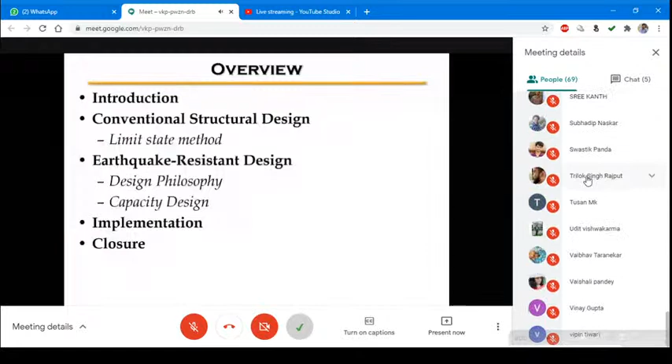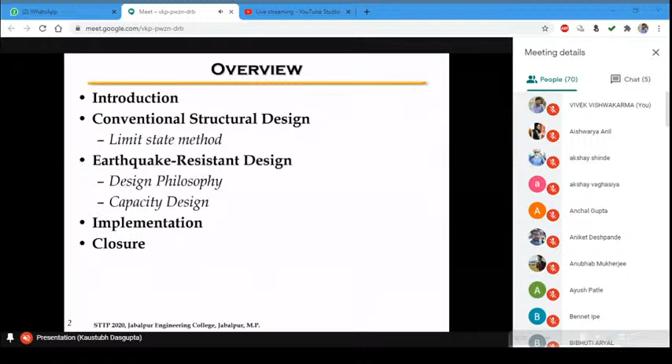So this is the overview of the topics which I'm going to deal with. First, we'll introduce what exactly an earthquake is and what its effects are. Then we will recapitulate some of the basic principles of conventional structural design, and see how we move into the earthquake resistant design philosophy, and finally culminate in the capacity design procedure. And then how do we implement this capacity design procedure in realistic design of buildings? I'll particularly focus on buildings, but in general it is applicable for any structure for which earthquake resistant design needs to be done. And then we will finally close with one or two of the major salient points.

As part of the introduction, let us recall what exactly happens during an earthquake. As you can see, there is the rupture of a fault at some deep location in the Earth's crust, which gives rise to release of seismic energy. That seismic energy was originally stored in the form of strains and deformations in the rocky mass. Once the energy gets released, waves start propagating in different directions, as shown along the two paths, the red and the green curved arrows. Along different directions the seismic waves propagate, and finally they reach the ground surface.

Initially they pass through the rocky mass. This is the rocky mass, and then they enter the ground layers, the soil layers. As you move towards the ground surface, they undergo all the mechanisms described in the physics of waves, giving rise to different wave fronts. Finally, when they reach the ground surface, they propagate primarily as surface waves, as you can see here, the wavy arrows. These surface waves are the most damaging ones from the structural engineering point of view.

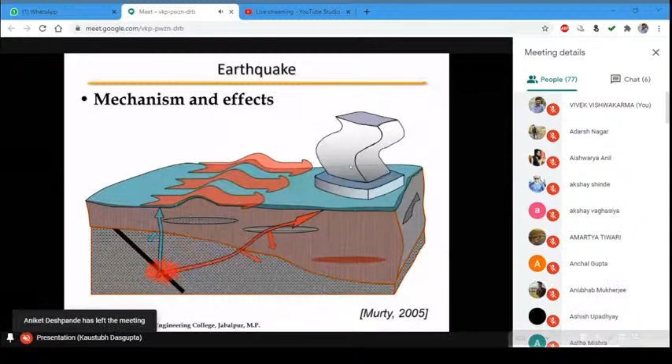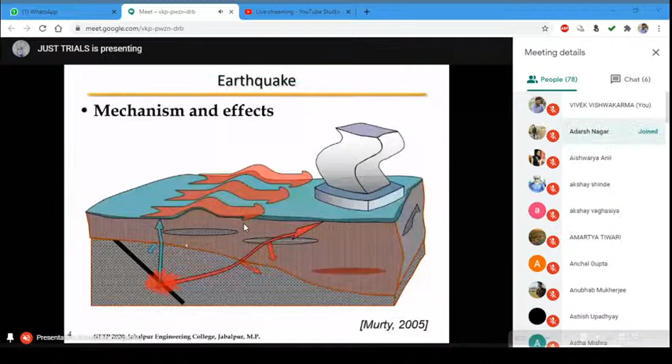As you can see, the foundation of the building first interacts with the waves along with the underlying soil. That vibration gets propagated into the superstructure, that is, the part of the building we see around. Once this entire system undergoes vibration, we get soil-structure-foundation interaction and all those effects. Surface waves are the damaging ones, and our earthquake resistant design primarily deals with the effects of the surface waves. We also have the body waves, which started propagating after the rupture of the fault and the release of the energy. However, those body waves are not so damaging from the structural point of view. Fine. So this is how the earthquake happens, and the waves come and shake up the entire structure.

So depending on the intensity of ground shaking under the surface waves, we can have different levels of damage, from minor damage to severe damage, and the well-known implications. Having gone through these effects of earthquake, let us see some of the visual effects we generally look around. Most of you are familiar with these, but let us recall what the different effects are. From a structural engineering point of view, the collapse of buildings under severe shaking is the primary concern. How do we prevent the entire collapse of the building?

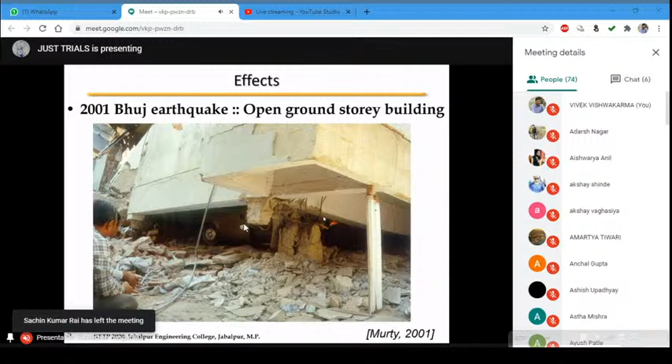As we will see in earthquake resistant design, sometimes we allow the building to undergo damage. It's not that your building will be entirely damage proof or distress proof during the earthquake shaking. It's not like that, otherwise it will not be an engineering structure. The economy will not be coming into the picture. Anyway, how to prevent such collapses is our primary concern.

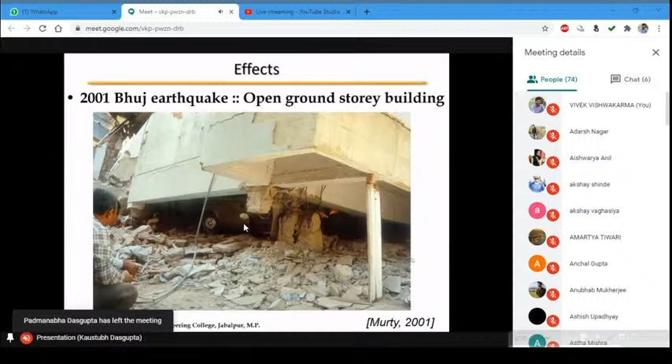This was taken from one of the building locations during the Bhuj earthquake. As you all know, the open ground story buildings were the most damaged ones during the Bhuj earthquake shaking, and this was one of the building collapses in Ahmedabad city. As you can see, a lot of infrastructure gets damaged. Next, we move on to bridge type structures, which are used in transportation engineering.

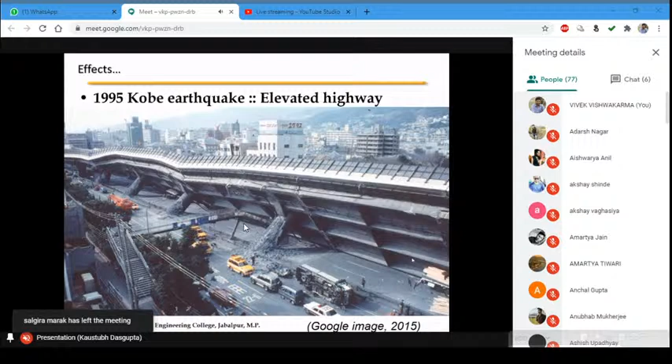So in no way, at any point of time, should they be allowed to collapse. They should always be in functional condition, whether there is an earthquake or no earthquake, whatever be the condition. Let us move to the next one.

This is a figure from Navlakhi port along the coastline of the Kutch region in Gujarat. That port area had a railway line running along the embankment along the coast. And then what happened? There was severe movement of the ground during the shaking. Those surface waves caused severe ground deformations, ground displacements. As we can see, the levels and the different reference points have all become topsy-turvy. The signal has undergone tilting, and the railway track has become undulated. So in no way are these in functional condition. Again, the same issue: if your railway track is damaged, your transportation of goods and wagons gets disrupted, and you cannot mobilize the relief and rescue missions.

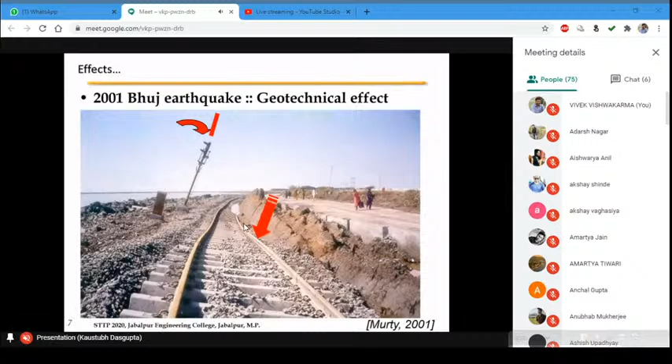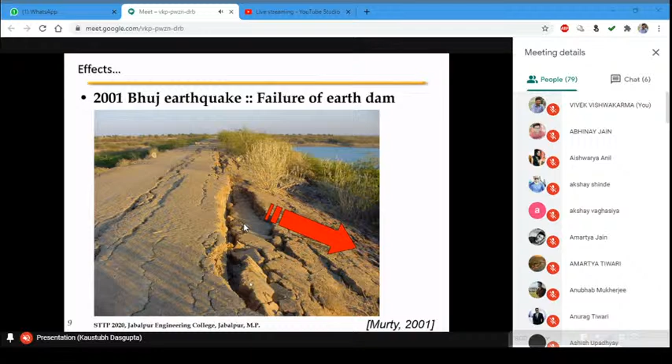As we have seen, different regimes of infrastructure undergo different types of damages, and the implications and consequences are manifold. Primarily, what we look at are the physical damages we see around visually, and the associated economic damages. Depending on the magnitude of the earthquake and the location of the site, we can have different degrees of damage.

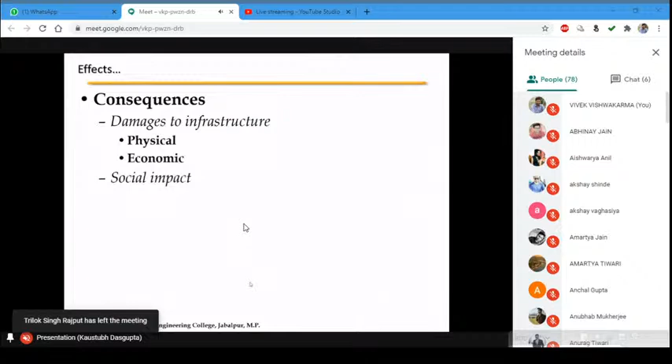Our society is not supposed to bear and see these damages. It is not a direct impact, but social impact is an indirect consequence, because many people have their livelihoods affected. That leaves a social impact on the future of daily wage earners and other people especially. It's not a direct consequence, but still it has a lasting effect. All this makes it imperative to focus on and carry out earthquake resistant design, so we never forget to highlight the importance of this issue.

Moving on, let us relook at what exactly conventional structural design says, and how we carry out the design of general buildings. Before we embark on design, we have to first analyze the structure, and nowadays most analysis is carried out with computer programs having different graphic user interfaces or background programs. First, we have to idealize the realistic building and model it in a way that captures the real behavior.

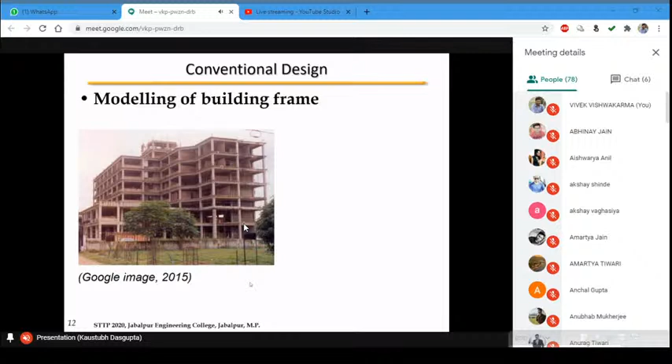So how do we model the building? That is the conventional way. All your beams and columns, as we see in this typical reinforced concrete frame building found in urban areas, are modeled. We may or may not model the floor slabs and the roof slab, but we never model the underlying soil over which the building stands. What is the reason?

Because the behavior of soil is more uncertain than the behavior of concrete and steel in the building. Unless you are certain to a particular degree how your material will behave, you never incorporate it in your design. That's why if you look at the design guidelines or codes of all countries throughout the world, nowhere does it talk about taking the soil model into consideration while analyzing the building for its design. That is the main reason.

And if you map this same philosophy into the dynamic behavior regime of the structure, the dynamics of this system will involve soil structure interaction, as I mentioned. So in soil structure interaction also, you will never find any provision or clause in any of those design guidelines. That is the main reason.

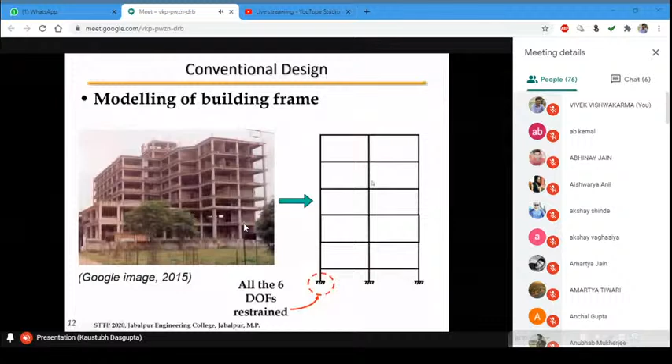So to analyze linear elastic behavior, we assign the design loads: the self weight of the building, your live load at different floors, that is the weight of the movement of the people or of goods. And then you have additional loads coming from wind, earthquake. If it is in a cold region, you may have snowfall and so on. So all those possible loads are considered. And when we are considering earthquake loads in analysis, we have to refer to the design load combination mentioned in the Indian standard IS 1893 2016. I forgot to mention the part.

This is part 1 for buildings, but there are other parts of IS 1893 also. So part 1 is for the building, and as you can see here, this is a frame building with reinforced concrete wall. So what you do, you isolate each member, and from the computer program itself, you get the design forces and moments. Basically, it solves the entire structure using finite element method, and then gives you the internal forces or internal moments at the different sections. If you draw the free body diagrams, you should also arrive at the equilibrium condition.

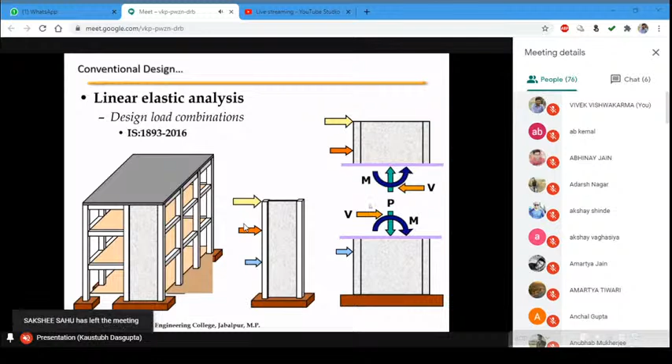So based on these design forces and moments, then you do the design as per the limit state method. As we know, the limit state method has two parts. One is the limit state of collapse, which deals with the strength of your member, how much bending moment the beam can take, how much shear force the beam or the column can take before it collapses. That is also the limiting strength or the ultimate strength, and we talk about the design capacity. Primarily your members in the building are designed against flexure and shear, that is the bending and the shear behavior. Depending on the geometry, whether the members are slender or short, squat members, you'll have dominating effect of either bending or shear.

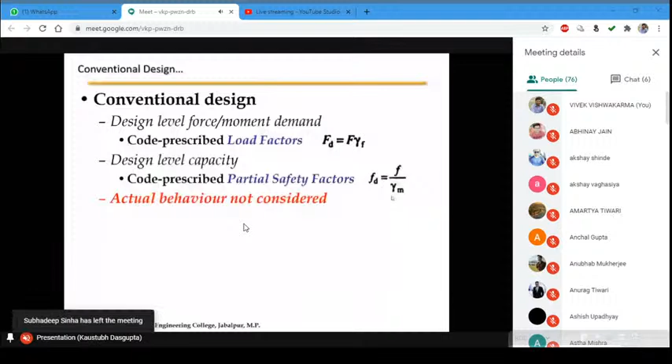So we never try to do the design calculation based on the exact actual material strength, because we never know what exactly is going to be the value. So we keep a sufficient safety margin so that we are on the conservative side. Since actual behavior is not considered, at some point of time we will see that we are not doing justice, especially when we are trying to do the design for resisting the earthquake effect.

So earthquake resistant design has two levels. One is the conventional design as per the limit state method, for strength and serviceability, collapse and serviceability. And the second stage is given by the capacity design. So in earthquake resistant design, capacity design is one part. When we talk about earthquake resistant design, it's not only capacity design. You have the conventional structural design in place. In the first place, you have to do it, no other way. And then you have to do the capacity design in order to ensure your safety against earthquake shaking, right? So this is how capacity design becomes mandatory in the entire earthquake resistant design procedure.

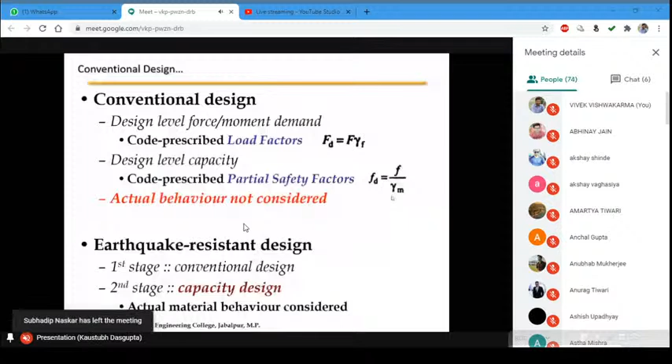So in capacity design, as we will see, the actual material behavior is considered. Okay. So let us briefly dwell upon the basic philosophy of earthquake resistant design. Before we go to earthquake resistant design, there is another term which many of you may be hearing or may be confused about: what exactly is the difference from earthquake resistant design. That term is earthquake proof design, right?

So it basically talks about an undamaged structure. Whatever be the level of shaking, the structure will not be damaged at any point. Now, what is damage? Under normal circumstances, we see that your beam or column or any concrete member has small cracks, micro cracks, which may be observable to the naked eye or may not be. And you also have many cracks in the interior mass of the concrete, which we can't observe from the outside.

So these cracks make the concrete weak, right? Any type of crack makes the section or the object weak. So is this damage? Structurally, the micro cracks are not part of the damage. Only under the application of load, when your cracks start propagating and new cracks are formed, and they have a detrimental effect on the behavior of your member, do we term them damaging cracks, part of the structural damage.

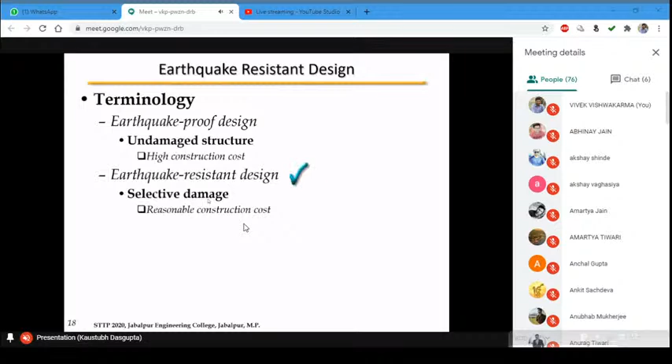So for ordinary structures, we always carry out earthquake resistant design, where we are going to have selective damage at certain locations. That brings down the construction cost, brings down the sizes, and makes it affordable for ordinary people. For earthquake resistant design to be carried out, we need to know the level of shaking. You have a building located at some site, and then you have different faults or geological features around the site. Some of them may be within 10 to 15 kilometers, some 50 kilometers, some may be 700 kilometers.

Now the question is, which are the faults going to give you the maximum possible shaking for the building at that site? That is the primary concern. And till now, it has not been possible to very accurately and deterministically state that yes, this is the maximum possible ground motion which is going to be experienced at this site. Till now, people have not been able to find that out.

So we generally talk about different levels of shaking, and most of the design philosophies are based on 3 levels of shaking. As you can see here, one is the minor shaking, one is the moderate shaking, and the third one is the strong shaking. Now, it's very obvious that if the shaking is minor, with very little vibration, your damages are minimal.

And if you have very strong shaking, you have the possibility of collapse. But then we also look at how frequent such earthquakes, which give minor shaking, are at that site. How frequent are earthquakes which give rise to this strong, very damaging shaking at that site? So there are 2 levels.

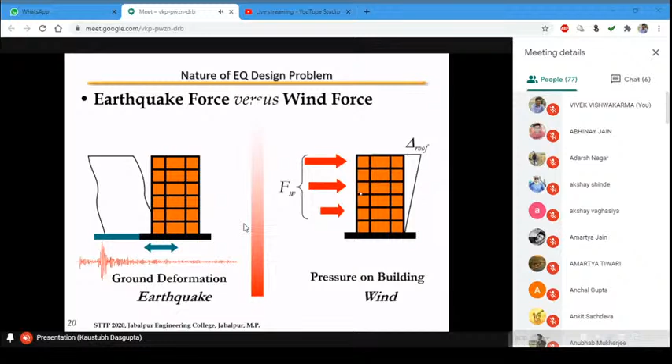Whereas in case of wind, we have the wind speed in different directions at different points of time, making it a dynamic pressure from different directions. So there is no deformation or movement of the ground involved, it is only application of lateral forces. So the deformation or the behavior of the building is completely different, because in an earthquake the deforming foundation shakes up the building, whereas in case of wind, the deformations come directly from the force or pressure application, right? Due to this difference in the application of force on the building, the two behaviors require two different characteristics.

If you take a very small idealized frame consisting of two columns and two levels, so two beams or two slabs, and you apply the force, it tries to sway, and that involves a top level displacement of delta at the top. So in this variation of H with delta, if you look at the curve, you get a generic curve like this. And in case of wind, when you are applying the pressure directly, the wind behavior is mostly in the linear elastic range, right? Unless you are looking at a very high intensity gust during cyclonic or tornado conditions, then you can have severe damage. Otherwise, it is linear elastic behavior, no damage is involved. So this wind behavior is mostly elastic.

However, during the ground deformation, the shaking of the bottom, when your frame is expected to deform, your lateral load behavior is going to involve a large range of deformation.

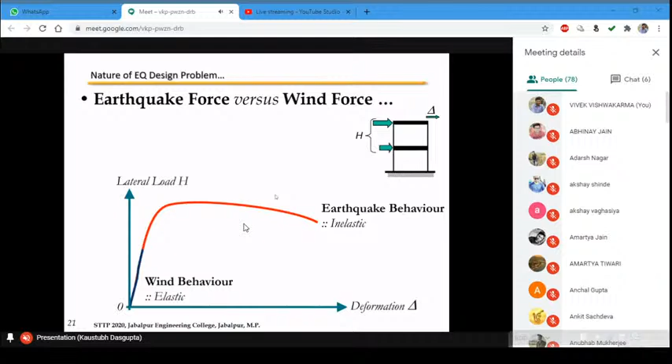Okay, so behavior wise also, the two applications of the ground deformations in earthquake and the dynamic pressures in the wind, okay, they bring different effects. So in order to understand in a slightly different aspect, the loading in case of earthquake is from ground deformation. As you can see, this is the general signature of the variation of displacement or velocity or acceleration of the ground shaking with time. So this involves the displacement loading on the foundation. So basically, we are applying displacement on the piles, displacement on the footing. We are not applying pressure on the beams and all. Whereas here, as you have mentioned, is direct application of the pressure on the building.

Okay. Now, some of you may be asking that we also look at a similar distribution of lateral forces in case of earthquake analysis. When you do the equivalent static method of analysis as per IS 1893 part 1, we also look at a diagram in somewhat similar way in case of earthquake also. So how does it arise? When we are saying that it is primarily due to ground deformation, but then when we really apply the seismic load, we have the different loads at the different floor levels. So how do we really reconcile these two?

So what happens is this dynamic shaking of the ground, this deformation time history or the deformation signature of the ground, is imposed on the foundation. It gets propagated to the top, the superstructure, the building. And then at different levels where masses are lumped in case of a multi-story building, we have the inertia forces coming into action. So the different levels of the lateral force application, what you have seen in these types of figures in case of earthquake loading, are nothing but the inertia forces which are generated at the different levels of lumped masses. At the floor levels where we have the slabs, we have the different masses lumped. So they are going to give rise to those inertia forces. Okay, so those forces are applied on the building, right?

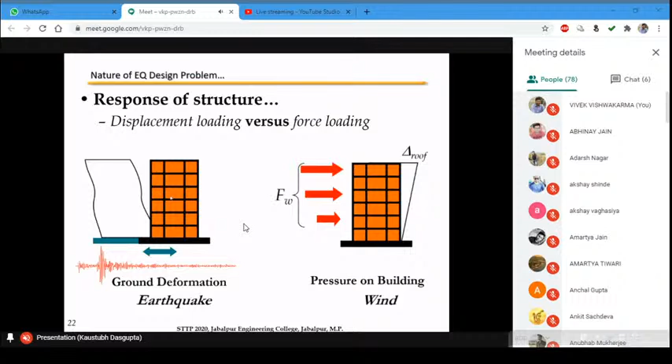So we have the force control system where you have the gravity loads under the self weight or under the wind, where failure occurs if the imposed load is more than the yield force. Why is it so? Because under gravity load, that is self weight, under live load, under wind, we do not expect any damage to occur. Linear elastic behavior. So we have the yield point, yield level in your entire nonlinear curve. Okay, so beyond this yield point, you never expect the structure to cross. Okay, so that's why your system is a force controlled system under self weight or live load like that.

Whereas in case of earthquake loads, it is a displacement controlled system, because as we have mentioned, we need large deformability. If you look at the figure, you have the large deformability or the displacement. So imposed displacement, if it is more than the yield displacement, still we do not call it a failure. Okay. So that is the fundamental difference between your force control system and displacement control system. So the main characteristic which we require for such a displacement control system is your ductility. Okay. The system should be ductile. So in earthquake resistant design, time and again we are also going to emphasize in the next slides that ductility is the key for a desirable behavior.

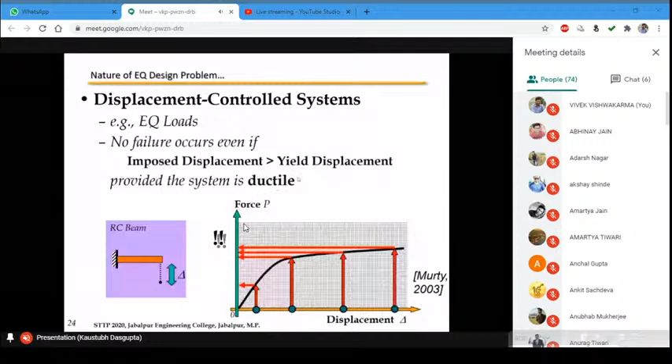So what exactly is ductility? Whenever we ask anybody what is ductility, we get different types of answers. Primarily in case of seismic behavior, earthquake resistant design, what we look at is a large extent of inelastic deformability, right? The inelastic deformation capacity will be large, with a certain condition. What is the condition? Your strength should not reduce.

A system cannot be a ductile system if that degradation of strength is observed. It has to maintain the level of strength, even at a large extent of inelastic deformation. There are different exact definitions of how much strength degradation is allowed when you call a system ductile, but primarily the strength degradation should be minimal. Then only we call the system ductile. It should not be like it picks up the strength and drops off and then you call it a ductile system.

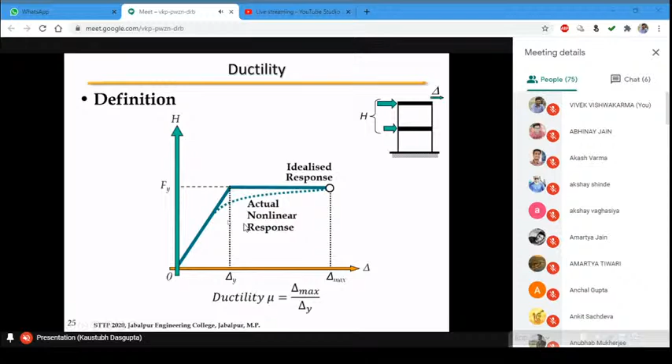And then when we try to mobilize ductility through the design procedure, we have a building with so many components and so many sections that the ductility also needs to be sufficient at different levels. So basically different measures of ductility are there depending on the location. One is the overall structural ductility. If you go back to the previous figure, here we were looking at this idealized small frame where we had the total lateral force H and the lateral deformation delta. So we were looking at the overall behavior. This graph shows the overall behavior of the frame. So the overall structural ductility should be sufficient.

Story ductility. What is story ductility? You take any story and you know the shear force at the bottom section of each column. You add them up, all the bottom sections of the columns. So at the bottom of this story, what is the total shear force? So total story shear versus the displacement of that story will give you the story ductility. Similarly, we get member ductility. For each of these columns, each of these beams, you get the member ductility. Of course, you get the section ductility. So there are different measures of ductility. I'm not going into the detail, but when you are doing the earthquake resistant design, all these you need to keep in mind. So that's what we desire.

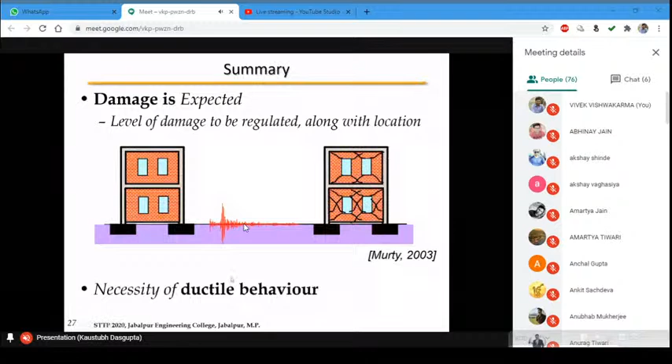So the question is whether we will allow it, or whether we will call this behavior the desired behavior or not. Your main structure is undamaged, but damage or energy dissipation has occurred at certain locations in your infill walls. So for every structure, looking at the components, we have to select the location where we want the damage to occur. And then you have the necessity of ductile behavior. That is utmost necessary. When you look at the overall behavior, we want to re-emphasize that if you continue the linear elastic behavior, you get the maximum elastic force. No damage. This is the level of force you will get if you want earthquake proof design.

Linear elastic behavior: no damage, no reduction in the stiffness, no reduction in the slope. This linear elastic response will give you that earthquake proof behavior. But we are going to land up with large sizes of members because this F max is a large strength. All your columns and members are going to have the total strength like this, and that will involve large sizes. Instead of that, we allow damage and then your slope gets reduced, and at the same time we have to trade off with a large deformability. So we want ductile response, but we don't want brittle response. Brittle response means your strength degradation is very high, and at very early deformation the strength gets degraded. So brittle response is strictly no. We want the ductile response.

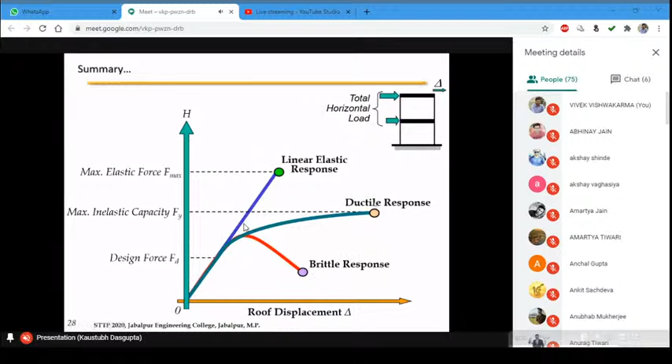In order to have good earthquake resistant behavior, we also need to avoid certain types of nonlinear behavior. Some of you may be familiar that whenever we talk about nonlinear behavior in structural engineering, we are primarily dealing with two types of nonlinearity. One is the material nonlinearity, which involves cracking of concrete, yielding of steel, crushing of mortar, crushing of concrete, like that. And there are other categories of nonlinearity, which is known as geometric nonlinearity, which deals with the deformed shape. One very common example of a detrimental geometric nonlinearity is buckling. The sudden lateral deformation under axial compression of any vertical member, that is called buckling.

Then you have the P delta effect, P capital delta, P small delta. All these are geometric nonlinearities. Now, if you look at the effect of geometric nonlinearity on the behavior, most of the time, if these geometric nonlinearities tend to dominate the behavior, you are going to land up with a brittle type of behavior. It will not be a ductile behavior. So we need to strictly impose the criteria to avoid geometric nonlinearity.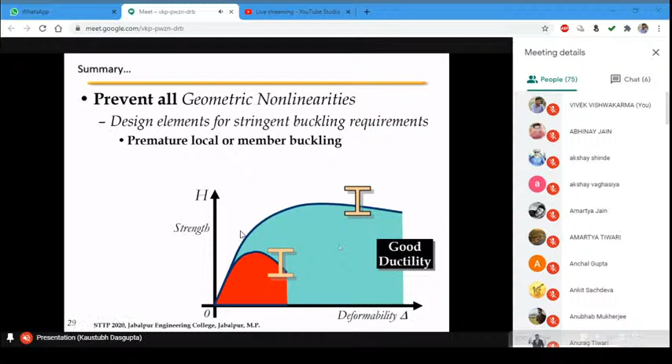Premature failure needs to be avoided. If premature failure occurs, very early failure occurs, your building will not be able to take that deformation, not be able to take that sway. Before that itself, it is going to go down. And we need to encourage different types of material nonlinearities. Why am I saying all material nonlinearities? Because in some way or the other, they help in the energy dissipation. Whatever seismic energy is coming as input to your building from the shaking of your foundation needs to get dissipated. Then only your proper behavior will be mobilized.

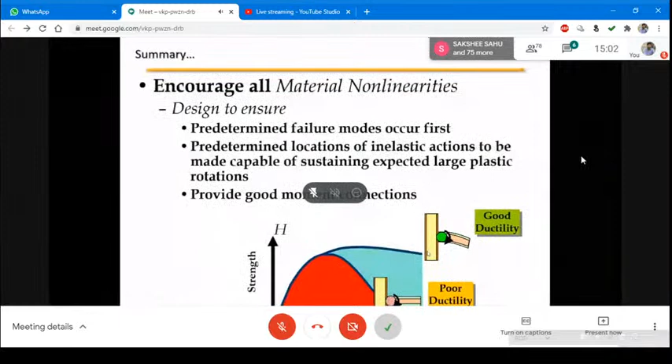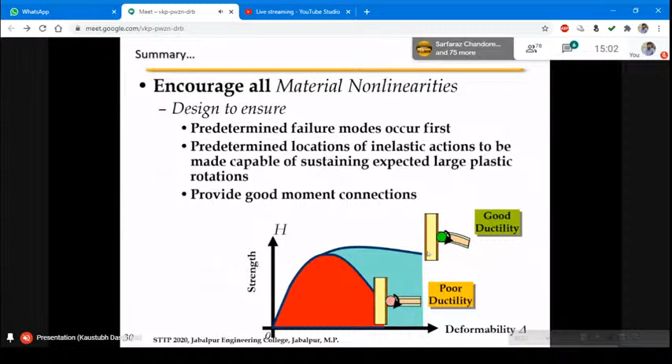So in that case, you need to determine which failure mode should occur first. Then your locations of inelastic action, then your moment resistant connections. All those come under the detailing. When you do the detailing, whether it's reinforced concrete, timber structure, masonry structure, steel structure, whatever you talk about, detailing is very, very important. So these are the summarizing points for an earthquake resistant design. As we had seen earlier, capacity design is one part of earthquake resistant design. So we will move to the capacity design.

Before that, let us take a break for a couple of minutes. If you have any questions till now, let us interact. Any question? Participants, if you have any question till now, you may ask.

When we teach in class, when we address our students, if we do not see any question, that means either the entire stuff has been very well understood, or it may not have been understood by anybody. Anyway, please feel free to ask any question. Others can also learn. Don't feel shy. I guess there are a number of students, right, Vipin? Yes, sir. Okay, so let's move on.

Having that background, since we have come across terms like requirement of ductility and selective damage at certain locations, these are all part of earthquake resistant design. How are these going to help in the capacity design? Because capacity design is the second stage and the most important stage for earthquake resistant design. So let us start with the failure sequence. When we start with the failure sequence, we look at the strength hierarchy. Which component is going to undergo failure first? Whether it's slab, beam, column, footing or the soil, whichever.

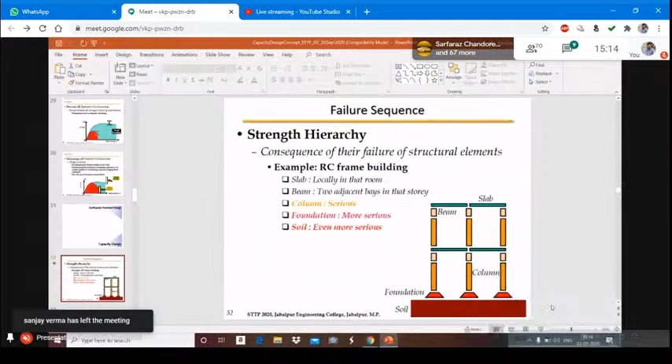Fine. So when we look at the different components, we have the columns failure giving serious consequences. We have the failure of foundation. It is more serious because most of the times it's very difficult to find out how the foundation failed, because you have the surrounding soil, and then how exactly it vibrated and behaved during the earthquake shaking is very, very difficult to ascertain. Okay, but still people put sensors and instrument the entire building, starting right from the foundation, soil, and every time. So but still they have serious consequences.

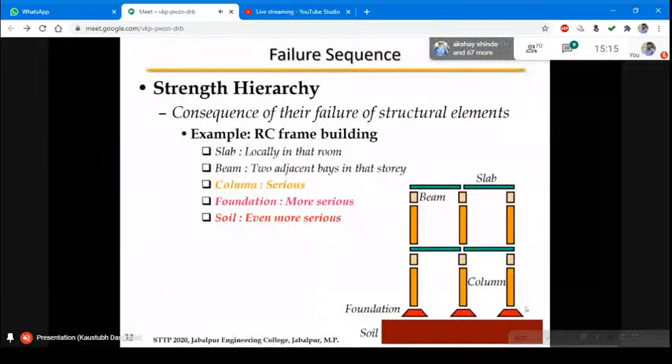And obviously, as I mentioned, the modeling of soil is very uncertain, and the failure of soil is also very, very detrimental. Okay, you never know which part of the building gets settled down, or some part of the soil may get liquefied. So there are various possible effects. So once we have the strength hierarchy, and then you have the type of damage. So some of the failures are brittle in nature, some of the failures are ductile in nature, right?

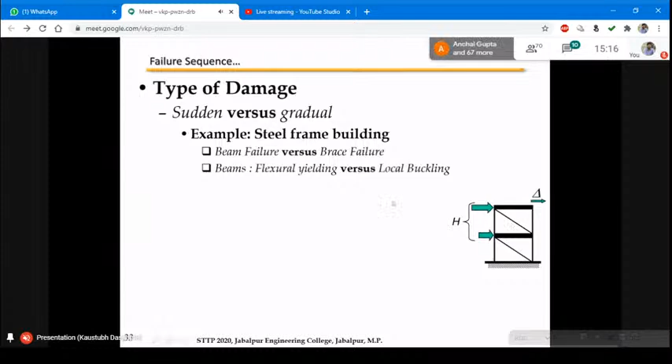So beams generally undergo flexural yielding. Okay, and then the beams can undergo local buckling also, like flange buckling, shear buckling, web buckling. There are different forms. So some of the brittle failure modes are possible, some of the ductile failure modes are possible. So again, if you plot the overall lateral force versus deformation profile, this curve, your desirable behavior is the ductile in nature with flexural yield response, and your geometric nonlinearity in some form of buckling, whether it's global buckling or local buckling, it's non-ductile. That's why we mentioned to avoid geometric nonlinearity in one of the earlier slides.

And brace failure, if it is in compression, okay, in the form of buckling, it should be avoided, because all these buckling failures, they are premature, they are not contributing to the required deformation capacity. Okay? So these should be avoided. So the type of damage becomes important. So in the earlier slide, we talked about the hierarchy, which component will fail first. Okay, and next comes the type of damage.

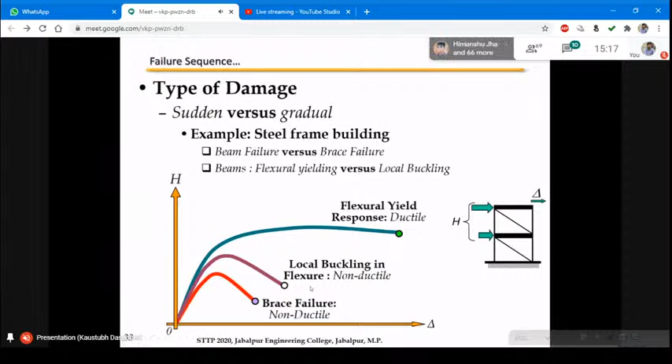Now, in your superstructure, if you leave apart the foundation and the soil part, in your superstructure, the slabs are least likely to fail. So most of the time, our capacity design for reinforced concrete frame building revolves around the failure of beam and column. Okay, so you can have two possible configurations of the building. Okay, under the same design load, you can have different configurations. So the sizes what you choose for the beams and the columns will give rise to one possibility where your column is comparatively weaker as compared to the beam, right? The second one has the beam comparatively weaker as compared to the column.

So one is called weak column, strong beam, because as you can see, the beams are having more depth as compared to the lateral dimensions of the column. And the other one has the weak beam, strong.

Now, as we mentioned in the strength hierarchy slide, the failure of columns is more detrimental as compared to the failure of beams, because they are the main supporting vertical members. So here, your beam is stronger as compared to the column. So the weak columns are most likely to fail earlier under the earthquake shaking. Okay. Do we want that? Strictly no, because we have the possibility of cascading collapse of the entire building.

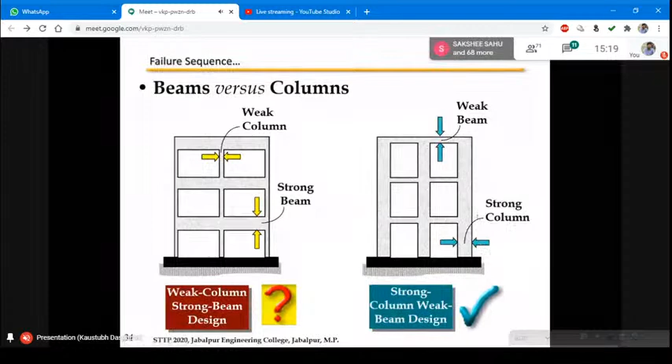Right. Then you have strong column, weak beam, the other one. What is the possibility here? Your column is not likely to fail before your beam. Okay, the beams will undergo failure first. So your overall frame, overall structure is not going to come down. You have low level beams getting distressed and damaged, but your overall structure will keep on standing. Okay, so this is desirable. So you should always go for the weak beam, strong column design.

Okay, so repeatedly, again and again, we all talk about this. So just to make you understand, for a frame type building, for each member or component, you decide which component you want to make weak and which component you want to make strong. Once you decide that, then everything falls in place. So that hierarchy is very, very important.

Then we come to the famous chain analogy. Okay, since we have two types of failure, one is the brittle failure, one is the ductile failure. As we have seen from the earlier slides, your ductile failure is desirable, brittle failure should be avoided. So now let us take a chain. Most of the links are brittle in nature, and an intermediate one is ductile. So this is the undeformed chain. So we have made the chain in such a way that the materials are brittle and ductile accordingly.

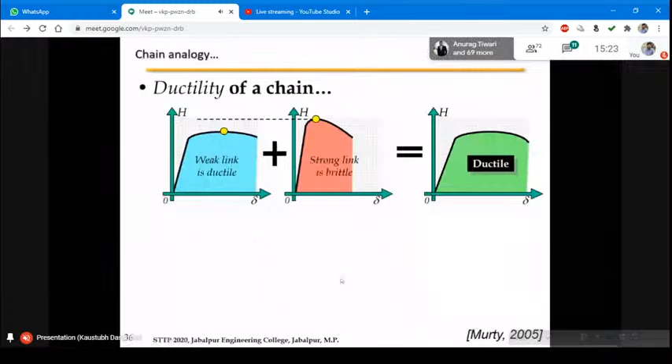So one point to be clarified: when we are talking about failure of a brittle link or brittle member, that means it reaches the peak strength and suddenly drops off. When we are talking of failure of a ductile link, we are not saying that it is going to drop off after that. So once it goes into the inelastic part, we are saying that the ductile link has undergone failure. So it's not that the ductile link is breaking off. No, it's not that.

If you try doing the same analogy, when the steel yields, we call that the failure point of the under reinforced section. So it is not that the steel reinforcement bar breaks off or ruptures. It gets yielded, so it gets stretched.

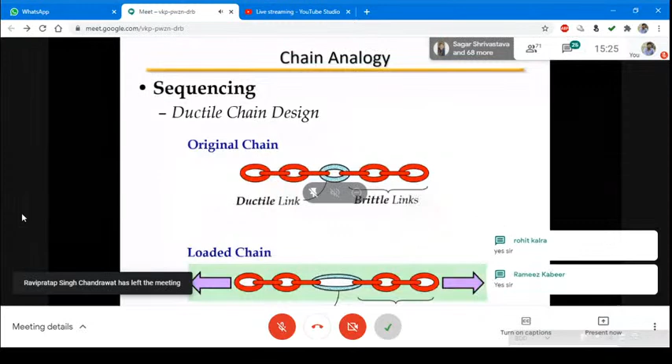Are you able to hear clearly? Hello. Is it audible Yes, sir. clearly? Yeah. Audible? Yes, sir. Audible. Okay, I'll continue. Okay, sir. Okay. Oh, again. it is breaking. The Hello, sir. is it breaking? Yeah, yes, sir. Okay, let me just Yeah. is it clear now? Hello. Yes, sir. It is clear.

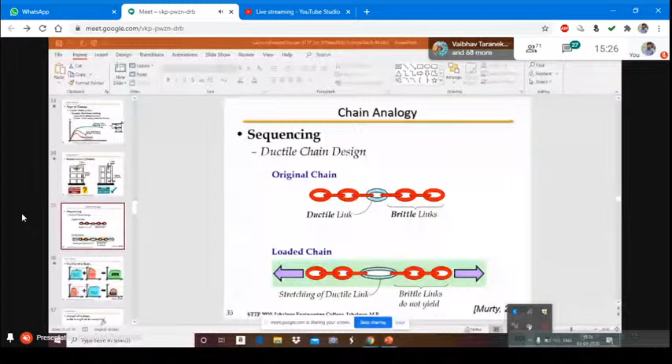Okay. So we are talking about this under reinforced failure. So the steel reinforcement yields, and that we call the failure point of the under reinforced section. It's not that the steel bar breaks. So that similar analogy is drawn here. So the ductile link is weak. That means it gets stretched once it fails.

So the second possibility, as we mentioned, is that the strong link is ductile and the weak link is the brittle one. So what will happen here? The brittle link is going to break off. The ductile link will remain intact, but the ductile link has not failed. That means the ductile link was unable to get stretched. So the overall failure is brittle. Okay. So these are the two failure possibilities in case of that chain, right? So the relative weakness and strength of the brittle and the ductile link will determine whether the failure of the chain is ductile or brittle. Okay. So now

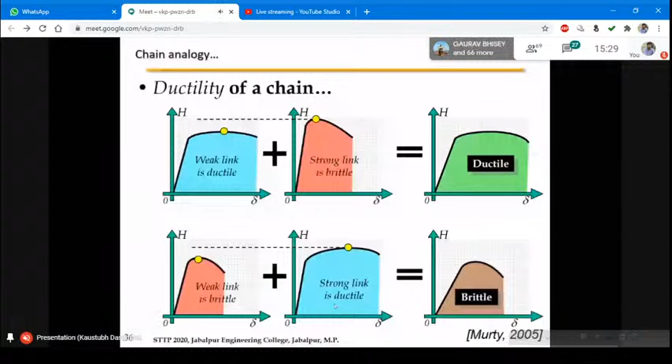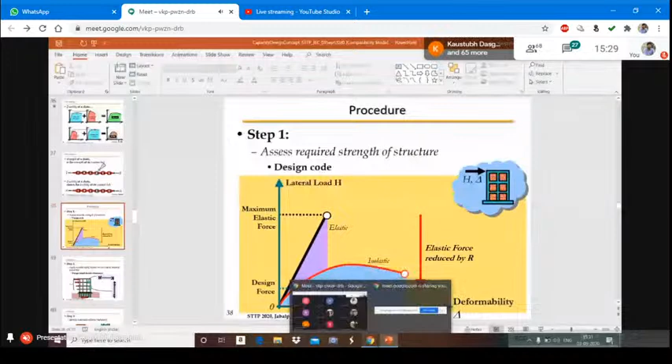Sir, your voice is not clear, sir. Yes, I'm just checking the network. Possibly the network is okay. Yeah, maybe, sir. Just try to reconnect with the network. Yes, sir. Okay.

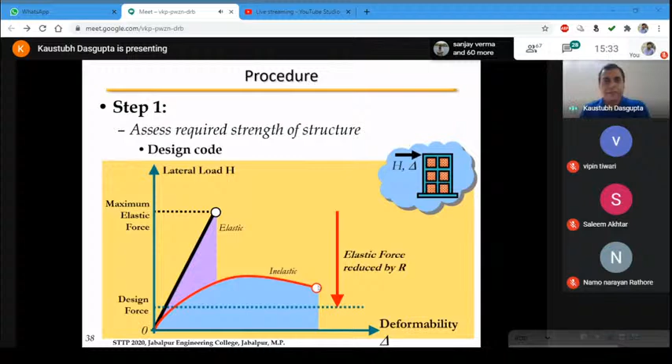Because as we mentioned, we want the damage to happen at certain locations. So the elastic force gets reduced by the response reduction factor. Right? So that will involve more deformability. Whatever is the required strength of the structure, that we try to assess. So basically this is part of the conventional design, what we do for our detailing.

Then we do the design. Once we have the design loads, we apply them at different levels, do the analysis, and then do the design as per the code specified safety factors. We have already applied the load factors, and then we apply the partial safety factor for material to obtain the dimensions and the detailing. We have to choose which elements we want to make weaker and which stronger, so that will come in the next stage. But primarily the dimensions and other detailing requirements are first obtained using these.

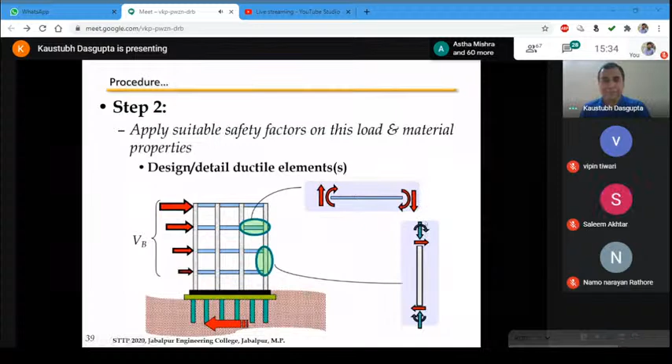We want to design or detail the ductile elements, the beams and the columns. So that is step 2. Once we finish the conventional analysis and design, then we have to choose the desirable collapse mechanism. There are two mechanisms we talked about. One is the weak column strong beam, also known as sway mechanism. The other one is the strong column weak beam. So there are two mechanisms, and then you choose the appropriate one.

Once you finalize the mechanism, then we try to obtain the upper bound strength of the ductile element. Your building is similar to a chain. Your building has brittle elements and ductile elements. Certain elements are going to be weaker, certain elements are going to be stronger. So accordingly, you have to fix the strength of the ductile elements, because the ductile elements are going to be the weaker ones. We want them to fail first. So the ductile elements have to possess that minimum strength.

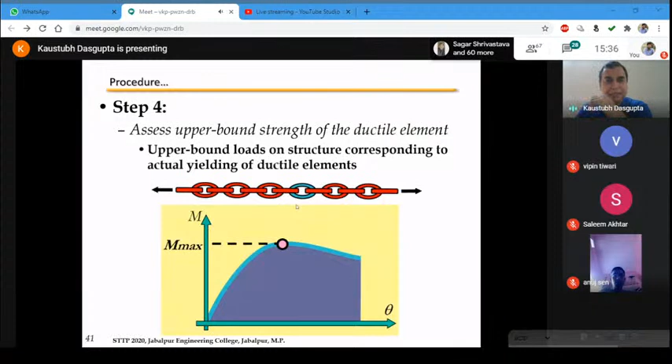So the design and detailing of the ductile elements has the maximum importance, right? Because they are the weak ones. They are going to fail first. So once we have the strength of the ductile element and the detail, then we design the brittle elements. So all the components have to be designed, isn't it? Both the ductile and the brittle elements.

So based on the failure of the weak element, whatever that time, force and moment is coming to the brittle element, for that we have to design, right? So why is it important? We want the weak element to fail first. At the time of failure of the weak element, there will be some bending moment, some shear force on the brittle element, right? So that shear force or the bending moment of the brittle element will be taken as the

design one, right? Earlier, when we did the conventional structural design, we were not concerned with this sequence. We were not concerned that one element will fail first, and based on that failure condition, we will design the other element. No, we were not concerned with that. All the elements were being designed at the same time. We are not concerned with which one to make fail first and which one to fail later. So that sequencing was not necessary.

Okay. So when the ductile elements are going to be undergoing that deformation, they are going to yield, they are going to fail. At that time, brittle elements should not fail. So brittle elements have to be designed under the forces and moment coming at the time of failure of the ductile elements. So the brittle elements need to be elastic. They should not reach their failure load. If they reach their failure load, the brittle elements are also going to fail at the same time. Okay. So this point is very, very important. When the ductile elements yield, the brittle elements should remain elastic.

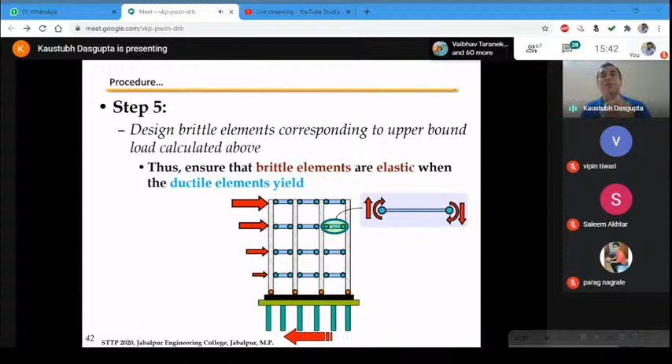So in case of the beam, what has been magnified here, you have the end shear forces and the bending moments generated after the damages happen. Okay, so if your beam is the weak element, the beam is going to have those damages first, and with the damages in the beams, whatever forces are going to come in the columns, which are the stronger ones, right? The columns are your stronger ones, because in the columns, as you can see, there is no such blue circle, right? So no damage has been observed in the column. So the columns are going to remain undamaged at the time of the beams getting damaged. Okay, so the beams are the weak elements, the columns are the stronger elements, right? So this is how you estimate the design force on the column at the time of the damage in the beam,

right? So these were the steps in the procedure, 5 steps. Let us implement them and see, in case of an RC frame building, how you really land up with the capacity design. Okay. Also, we need to see whether you need to carry out any reinforcement detailing to make it consistent with that.

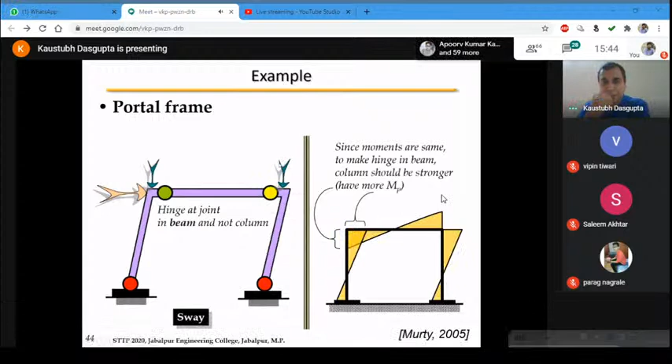Okay. Then let us move to the multi-storied frame. So your superstructure will have the different components. Your beam column joints are also important, because as such we are not much concerned with the design of beam column joints. Only when we do the capacity design, earthquake resistant design, we really look at the strength of the beam column joint. Otherwise, in conventional design, we hardly look at the strength of beam column joint. We hardly do the design.

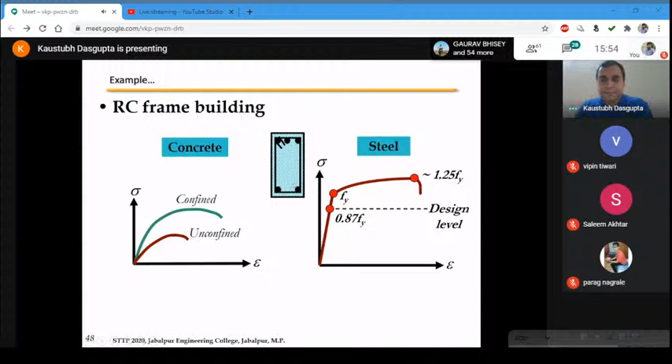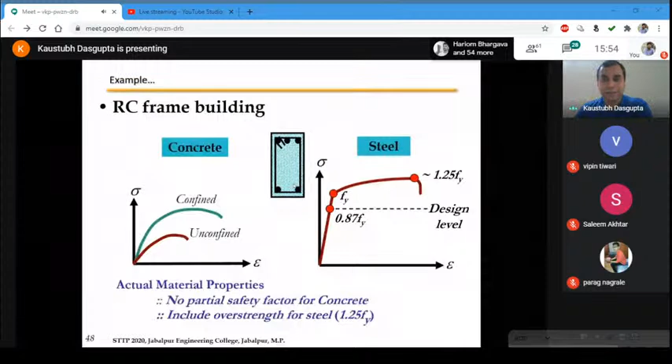So actual material properties are used, as we mentioned, the overstrength is considered, and we are not considering the partial safety factor. So when you look at the analysis with the plastic hinge, since the beam is primarily undergoing bending, we look at the moment rotation curve. When you study nonlinear analysis, we'll see that the moment rotation curve is an important characteristic which we try to give. We'll not go into the detail, but your overstrength characteristic is illustrated by one such example.

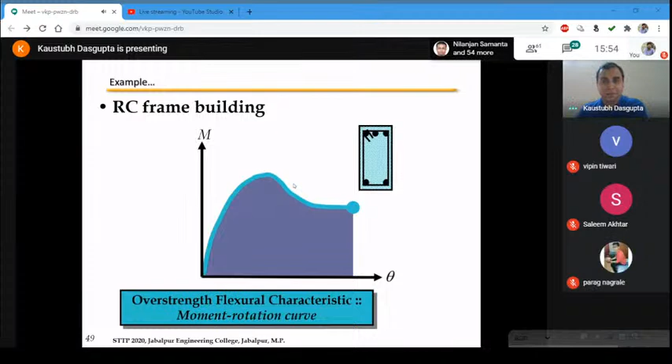Now comes the important part. As we had mentioned, your beam section is now having more moment capacity, that is going to give rise to more equilibrium shear force. So your total shear force in the beam will come one from the gravity load, the UDL on the beam, dead load, live load, whatever is there. If small w is the intensity of your dead load and L is the span of the beam, we all know that at the two ends the reactions are WL by 2, and then you have the additional shear force coming due to these plastic hinges or the sections of the damages, right?

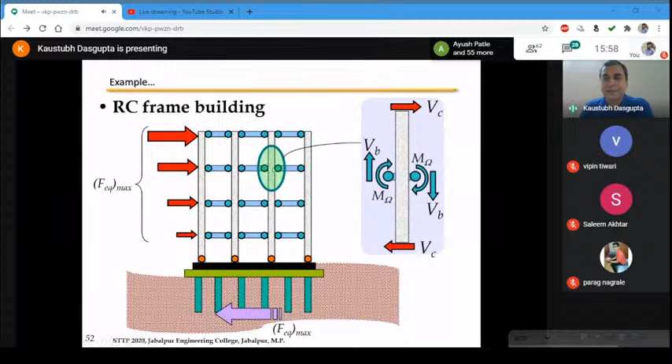Now, once you design the beam, what happens? These beams are framing into the columns at different story levels, at the floor levels. So you have the beam column joint, which is zoomed here. If you zoom in, you have the shear forces and the two beam moments and the shear forces in the column, right? What we do here is we have the points of contraflexion, that is points of zero bending moment in the column at the mid height location approximately. At points of contraflexion, you do not have any bending moment. So if you take the free body diagram of the column and you try to see the internal forces or moments, then you get only the shear forces.

However, since we are taking the free body diagram at the end of the beam, just at this location, your moments as well as the shear forces are shown. So this end of the column, top end and the bottom end, are approximately at mid height for the column. Once you take this free body diagram, then what happens? Now your column design comes into action. You are basically interested to find out the shear forces VC, because we have already designed the beam.

When the beams are failing, M omega was mobilized. At the time of M omega being mobilized, what is the shear force in the column? That's how our principle was stated, right? When the weak elements fail, what are the forces in the stronger elements? Okay. So when M omega is mobilized at the beam end, what is the shear force VC in the column?

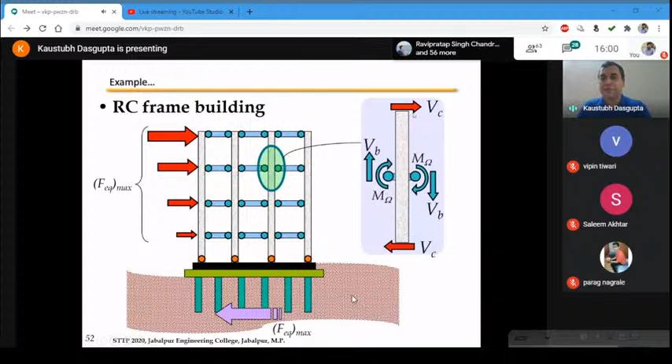So for that, what we do, your frame member has this moment rotation property that depends on the axial force. When you are designing the column, you have this PM interaction also, right? So both these come very handy when you have the nonlinear analysis. In case of beam, only moment rotation is used because the axial force is neglected in case of beam. However, in case of column, the PM interaction comes into picture.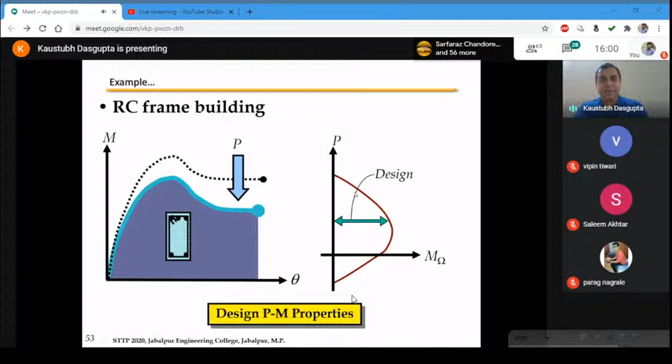Okay? So when you particularly magnify at this beam column joint, right, what you have is the overstrength beam moment. We already looked at M omega. And then if you take at the column section, at the end of the column, not at point of contraflexion, then obviously you have the moment capacity. Now here, your weak beam strong column has another check, right? So this is your design PM curve for column. So what will happen is your columns are not going to fail, isn't it? Columns are not going to fail. Your beams are going to fail because beams will have that m omega, but columns are not going to fail.

So when you look at the design of the column, we use that familiar curve of SP16 when you are looking at the conventional design. So for the axial force, you have the overstrength moment demand for beam, right? Your design moment of column should be more than that, right? So when your beam moment is mobilized, m omega is mobilized, the moment in the column section, that means at this location as well as this location, they should be more than that. In fact, there is a relation given in IS 13920. We will come to that.

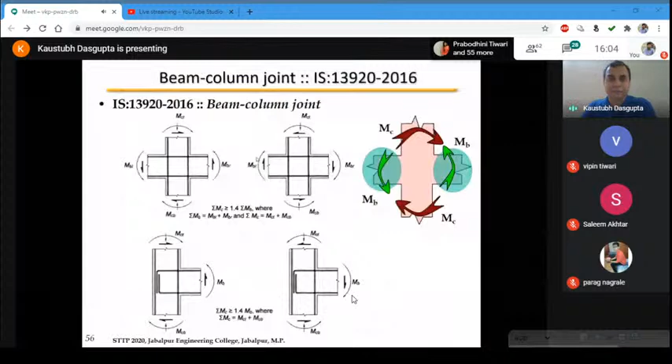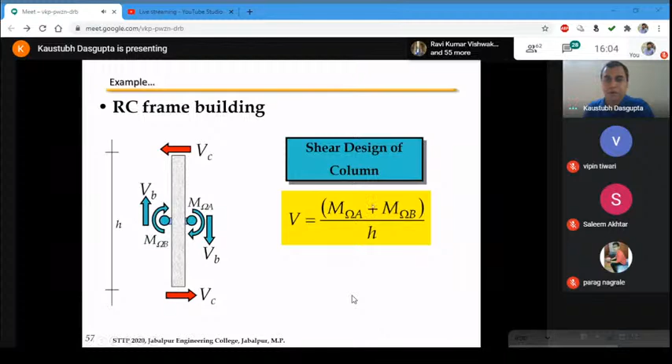So now our intention was to find out the shear situation of the column. What happens to the column shear force? Okay, so your column shear force is mobilized based on the same free body diagram what we looked earlier. Okay, so based on the overstrength moment capacity of the beam ends, you get the shear forces. Okay, this is simply from the moment equilibrium, all of you know. So this is again reflected from the diagrams in IS 13920.

You have two conditions. One is sway towards right, sway towards left. Okay, so this one is sway towards right. Okay, when your beam is bending in double curvature. So on this side you have the beam going in the hogging configuration and then going into the sagging one, right? So you will have the hogging moment like this. Here you will have the sagging moment. So this is the sway to right.

Okay. So under that condition, you can match the same nature of the forces. Now, in the previous equation for the beam, please note that you have a factor of 1.4. What is the genesis of this 1.4? It is the ratio of 1.25 in the steel strength and 0.87; 1.25 by 0.87 is 1.4. So the same thing is reflected.

What is the underlying fact? In earthquake resistant design, in fact in all design, we have under reinforced failure. So the failure of reinforcing steel is going to be first before the crushing of concrete. So your steel is going to reach that overstrength level earlier. So that 1.4 factor comes from that ratio. Okay. So this is how the 1.4 comes into the picture.

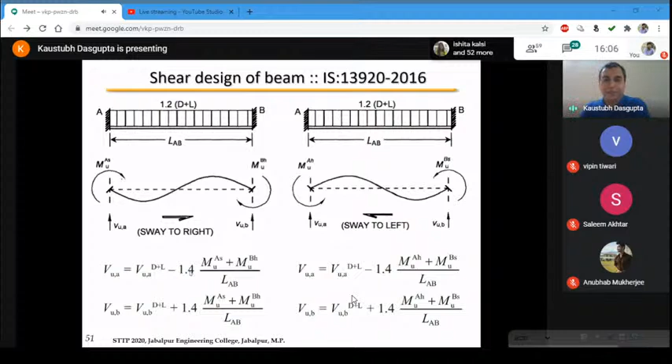The same 1.4 is reflected in the case of columns. So this 1.4 is from that same beam equation that we had seen. This is the overstrength moment. So basically this M omega is being expressed as 1.4 times the design moment. So this M subscript u superscript bh is the limiting moment of resistance from the design at the point B, or at section B, under hogging condition.

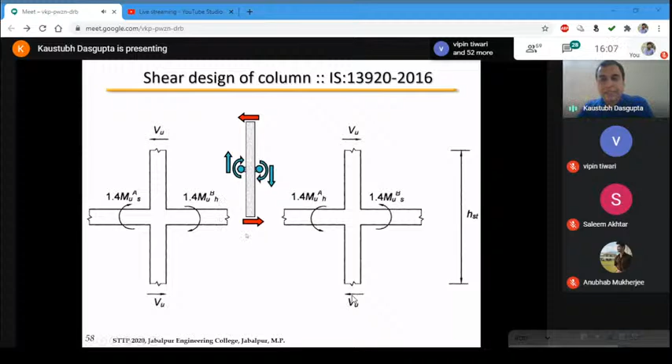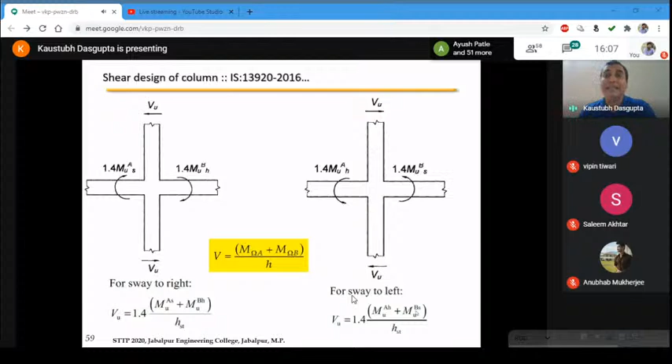So these are the same figures of the shear design of the column, and when you look at the equation, you get the same nature of equation that we earlier looked at. So again, this 1.4 factor is there. So all these are part of your capacity design, no difference. All these are well implemented in IS 13920 at beam level, at column level, for the beam column joint. So once somebody follows IS 13920 in minute detail, he or she should be able to incorporate capacity design. This is not at all a difficult one. There is no major challenge here, but the challenge comes only when you do the detailing. So the detailing part is very, very important.

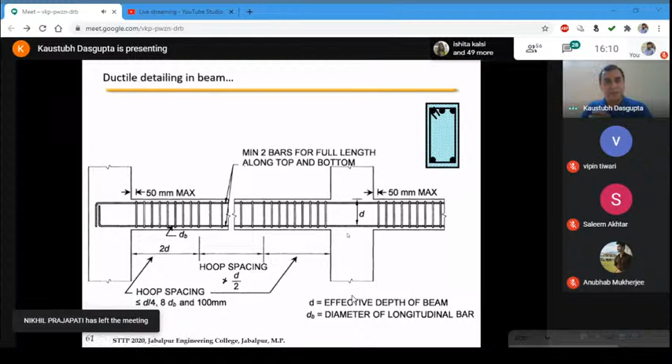But your main reinforcing bars, the main longitudinal bars, are supposed to undergo yielding. They are allowed to. So the spacing of the hoops, the required diameter, and all those details are prescribed for capacity design. Next, when you come to ductile detailing in columns, because this is all part of implementation. Finally, your behavior will depend on how you have carried out the detailing. If your detailing is good in all the reinforced concrete members, your behavior is as desirable.

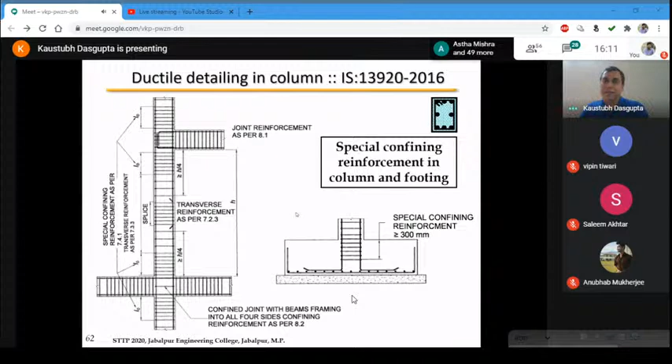Okay, so if these are implemented at site, the capacity design is being implemented. So all these are part of ductile detailing, and ductile detailing is very much necessary if you want to implement the capacity design. The calculation for the confining reinforcement is given by these equations. These are for rectangular sections. You have a similar set of equations for circular sections. So these are well established.

Only thing, depending on the size of the column, sometimes the transverse reinforcement becomes very congesting. Congesting in the sense that you may have to use large diameter ones in order to have sufficient gap, because you should not have very small intervals between the two levels of ties. Once you pour the concrete, afterwards in many places you still vibrate with a manual vibrator, right? So the needle vibrator needs to go inside the core concrete and get it vibrated properly. If the spacing of the ties is too small, your vibrator will not be going in. So that is the major challenge, how to play around with these numbers.

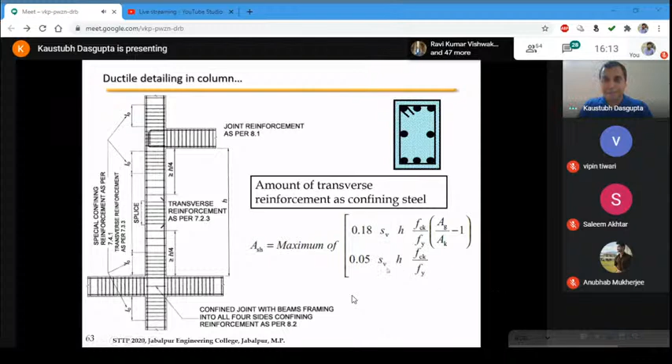So anyway, once you solve an example, it will be clear. These are all the implementation part, and I've just focused on the basic diagrams and figures so that the underlying concept is clear. So towards the closure, the main importance is the strategy to improve the ductility. That is how your entire earthquake resistant design revolves around: how to make the structure ductile and strong, right?

There are other characteristics required for overall earthquake resistant design. We look at the stiffness, we look at configuration. Probably Professor Hemant Kaushik must have told some of the points yesterday, and these are the basic criteria that you require, and then you have to decide the collapse mechanism, right? And then increase redundancy in the structure. What is meant by redundancy? Your weak elements are going to fail. At the same time, brittle elements should not fail. So there must be enough margin, enough reserve strength in the structure so that it keeps on standing. It should not happen that the beams are failing and the columns are so weak that they are also failing at the same time. That should be avoided.

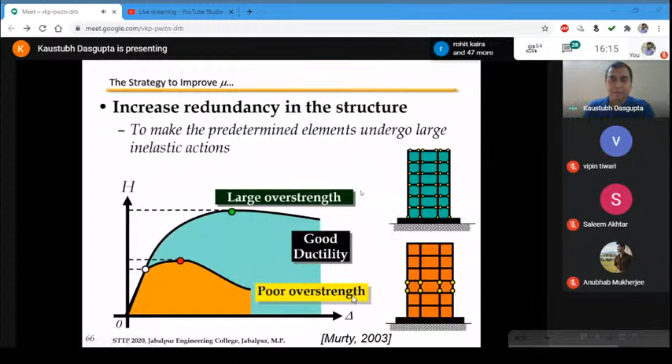So ductility and overstrength play a major role in those things. Sometimes we observe that in a multi-story building, a certain story becomes weak. The other stories remain very well, but one of the stories has been so weak that it collapsed. It's something to be avoided. It's not at all desirable. And then we mentioned that at the predetermined locations of inelastic action, they should undergo the desirable behavior, whatever behavior you are designing for.